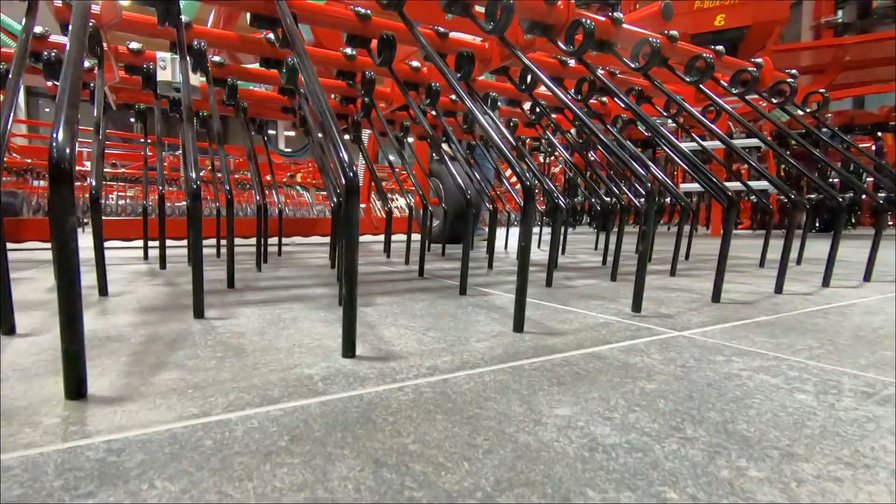Today I will give you an overview of our grassland care products and how to use them properly. After this short introduction, we're going to start with the training: Increase Forage Quality, Secure Grassland Yields. In the general part, I will give you an overview about the company and myself. Afterwards, we're going to take a look at the benefits of grassland care, what the targets on grassland care are, common problems and mistakes made in grassland care, and the right technique and operation. Directly after the training, you can ask questions in the live chat which have not been answered yet.

Now I would like to introduce you a little closer to the company EINBÖCK. The company is a family-owned business which is currently run by the third generation, and the fourth generation is also already included in the company. We are located in Austria at Dorf an der Pram. All development, construction, production and everything else is done here. At the moment we have approximately 200 employees, where 160 are in production and approximately 40 are in the office. You can buy our machines all over the world, and in most countries we have importers. In the US and in France we have daughter companies who take care of the sales. More details regarding our company and where you can buy our machines you will find on our homepage.

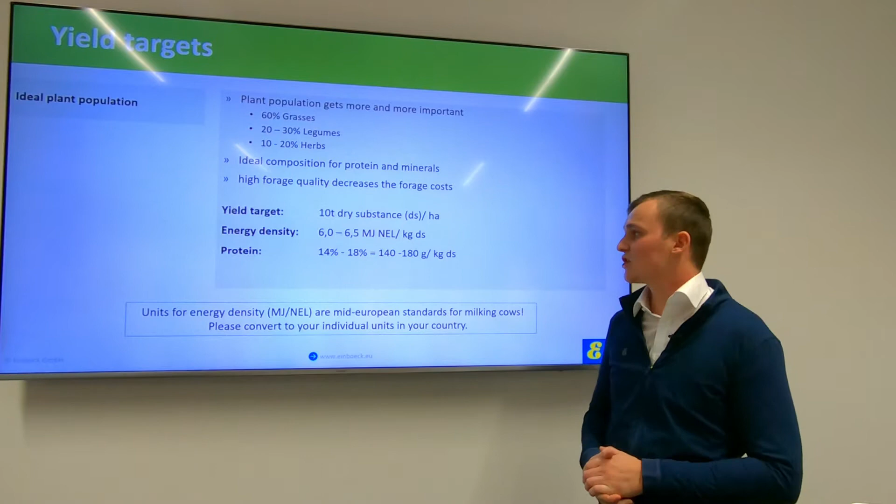High forage quality decreases the forage costs. Due to higher demands in milk production, it's necessary to increase forage quality. Here are yield targets for a high intense grassland with approximately 5 cuts a year. Our yield target here is 10 tons of dry substance per hectare. The energy density should be around 6.0 to 6.5 megajoule NEL per kilogram dry substance, and the protein should be somewhere between 14 and 18%. But please take care: the megajoule NEL is a mid-European standard for milking cows. Please convert your individual units to your country.

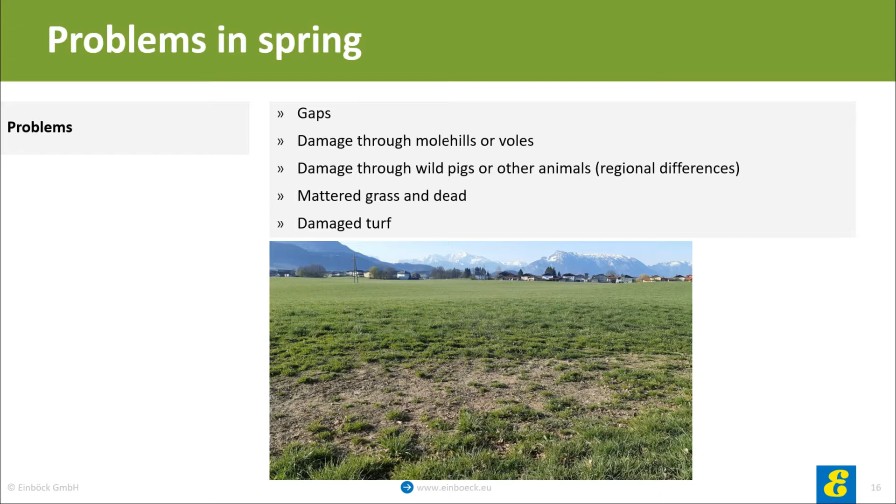To conclude, which problems do we usually face in spring? First of all, gaps of course, then damage through molehills and voles, damage through wild pigs or other animals. There is some regional difference of course, then matted dead old grass and a damaged turf.

In addition, there are a few factors which add to these problems. For example, slurry, high concentrated, spread out during wrong weather conditions. An unbalanced fertilizing can harm the grassland as well. Grassland which is too short or too long during winter will get a very slow start during spring.

And as for management, many cuts on an intense grassland can depress key plants. Pasturing in wet conditions can make big damage as well, due to footsteps and especially at the water access.

There are also many mistakes in management which can be done by mowing. The cutting height should always be above 7 centimeters. A big topic is always soil compaction in wet years.

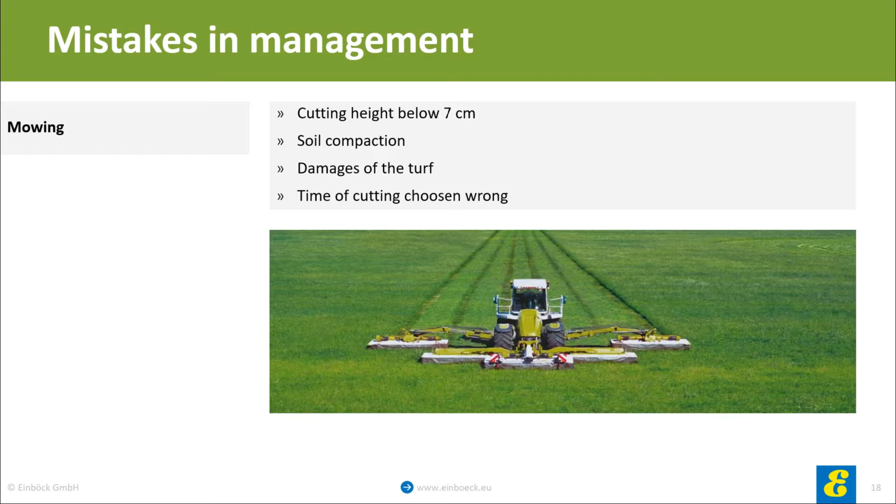I know it can be tricky due to time pressure while making hay or silage, but tremendous damage on the turf can be done. And the time of cutting is sometimes chosen wrong. Too late cuts can weaken the turf as well.

Soil compaction when driving on wet soil limits the growth of precious forage. Avoid mowing and spreading slurry in wet conditions. Often tracks are still visible in the next seasons.

But towing the grassland with a simple harrow is too little for quality forage and will not harm any weeds. Just mowing or towing the grassland once in spring is too little.

To have a quality forage, there needs to be some input. If there is no input, you cannot expect an output either. That's the same with arable land.

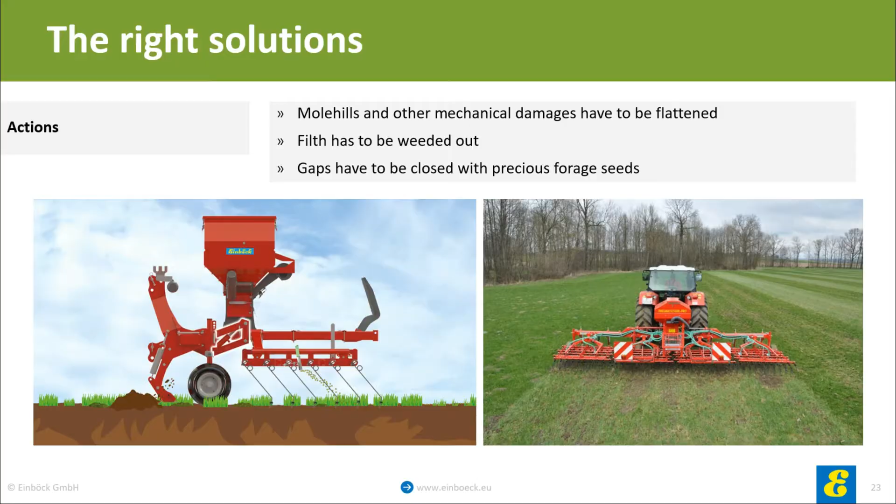On the right hand side, we see a picture of how grassland usually looks in spring. And here we see the gaps, and these gaps definitely have to be filled with new seeds again. With this machine, big molehills and other damages are leveled with the front leveling plate.

If you would just tow the grassland with a harrow, you would smudge the open and wet soil and the pores would not be open anymore. With this special front leveling plate, the open soil is jumping into the space where the tines are and will be distributed there. And here we have an overload protection by a tension spring.

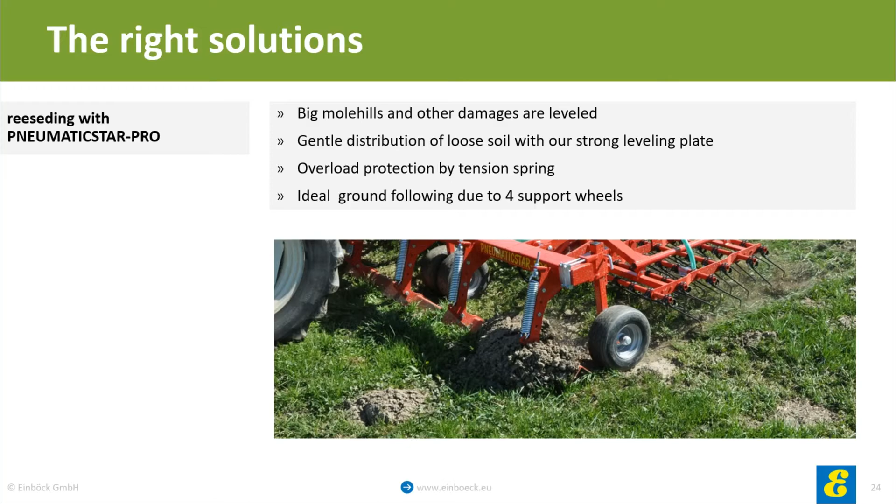Now a short video of how that's working in practice. Here you see a classic grassland in spring. The grassland is already in vegetation, before it maybe has been too wet or something.

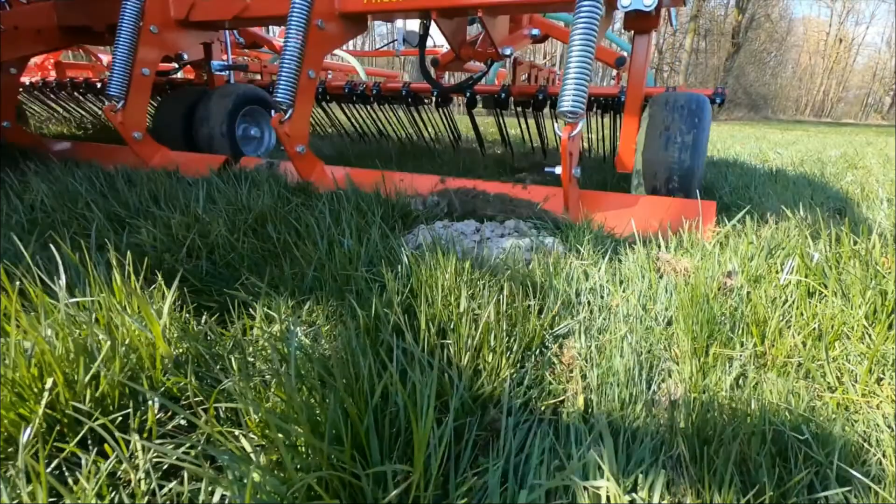And now we see what happens. The molehill will be lifted and distributed gently to the tine sections. Now that's important. Here you see how it should look afterwards. The soil is open and the pores are not smudged or anything. The soil can breathe and reseeds can quickly germinate in this good soil structure.

Then the tines are doing their work. The EINBÖCK tines are individually developed for grassland. For lighter soil, the tines with 8 mm diameter are recommended. These are also the standard tines on the EINBÖCK grassland machines. Highly recommended in all other conditions are the 10 mm tines. These are the classic grassland tines.

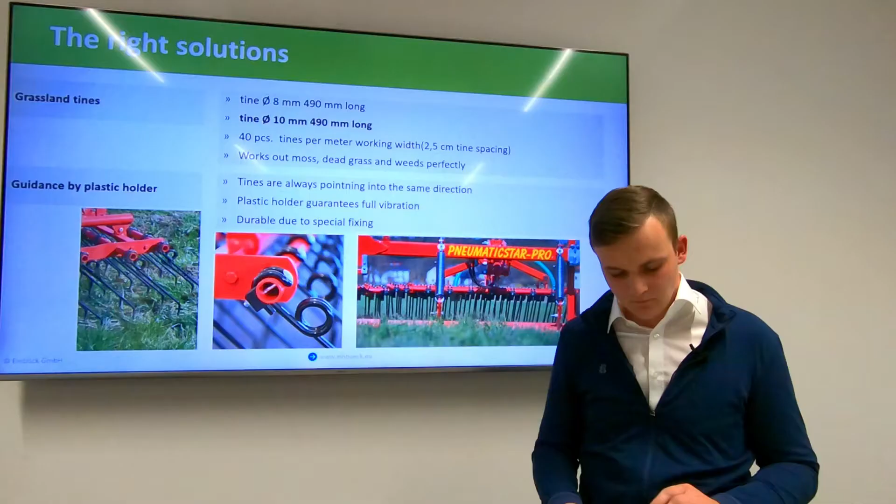EINBÖCK has 40 tines per meter working width, so that's 2.5 cm tine distance. That's really perfect for getting out moss, dead old grass, and they weed perfectly. The tine itself is held by a plastic holder. The holder ensures that the tine is always guided straight and also goes back to a straight position as soon as work is done. The tines are bent at the end, which we can see here.

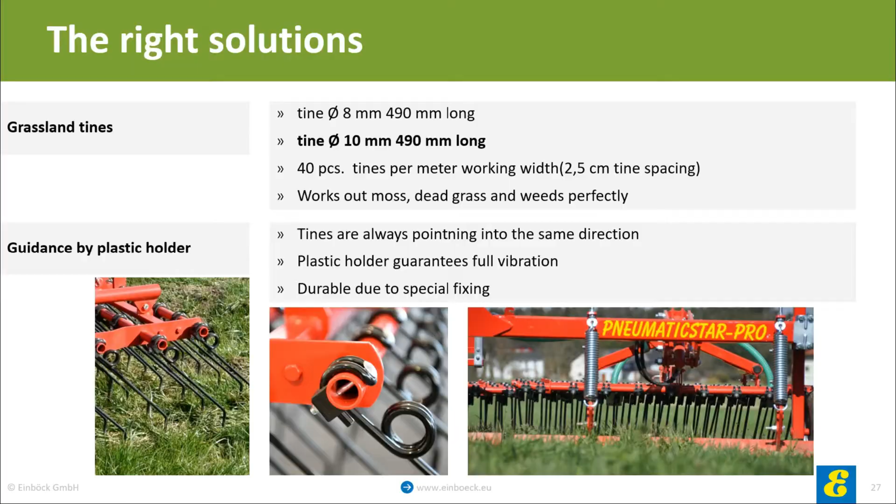Therefore, it's possible to adjust it with the handle on each section to pretty aggressive to the front or to drag when maybe the grassland is a little wet. Here we see the tine distance once again. The tines are mounted on 6 rows, so the machine is really working the whole surface. Many grassland machines on the market only have 1/3 the amount of tines, sometimes only mounted on 2 rows. With that solution, it's not possible to work the whole surface in one crossing.

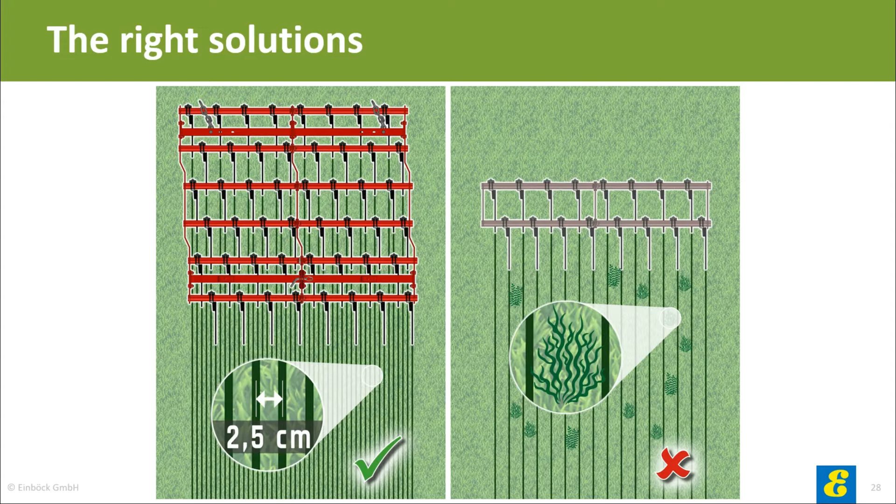Here we see pretty well how the organic matter can be worked out on the full surface with the many tines we have on the weeder. The machine has the perfect frame for this work. The main frame is following the ground perfectly. In addition, the machine is guided by 4 support wheels, which includes 2 double wheels in the middle. The folding wings can also compensate 10 cm to the bottom, so it's perfectly following the ground.

The hydraulic level control, which we have here, has quite a lot of advantages. The hydraulic sections are all connected to each other, therefore the system is taking pressures from weeding in the crusty soil at the beginning of the season from the machine like a spring and will distribute them to all sections. The hydraulic pressure can be decreased or increased from the tractor cabin, so that's pretty comfy.

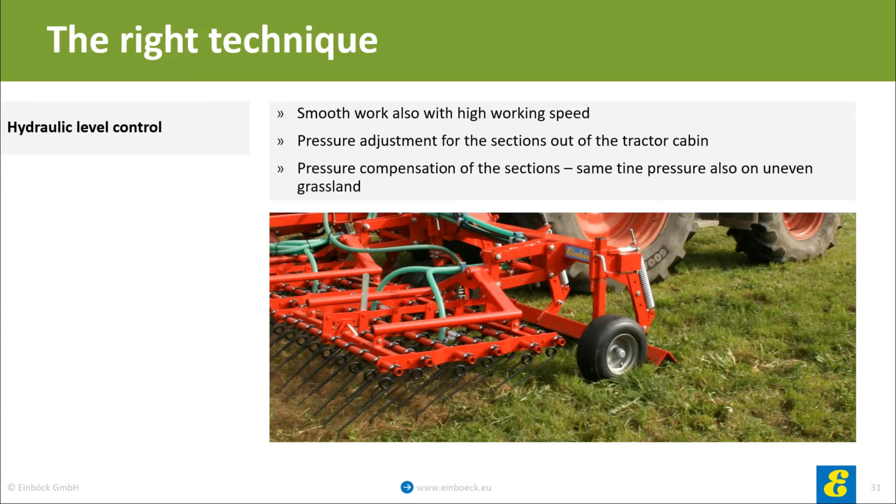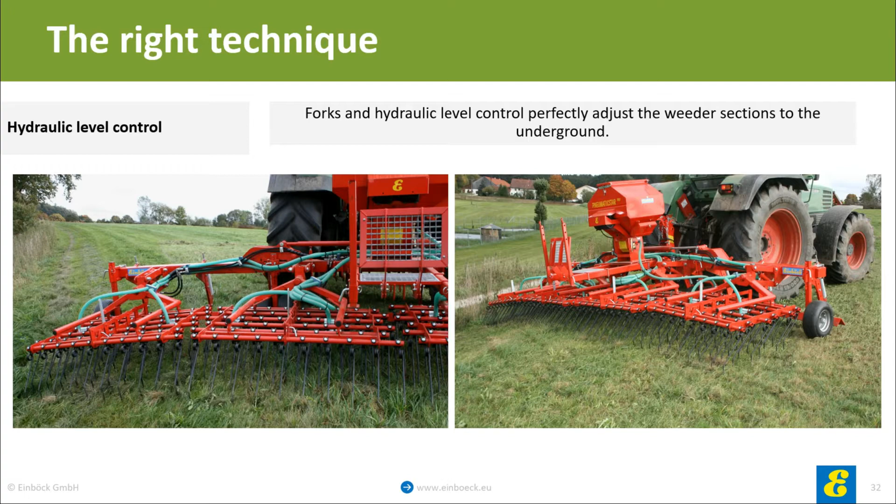Also, as the leveling plate is in front of the support wheels, the machine is running much more gently. As we see right here on the pictures, the hydraulic level control provides perfect ground following on the edge of fields or on hilly land. Now, here is a short video of how the machine is working. That's how grassland care should be done. The organic matter is weeded out and grass is reseeded.

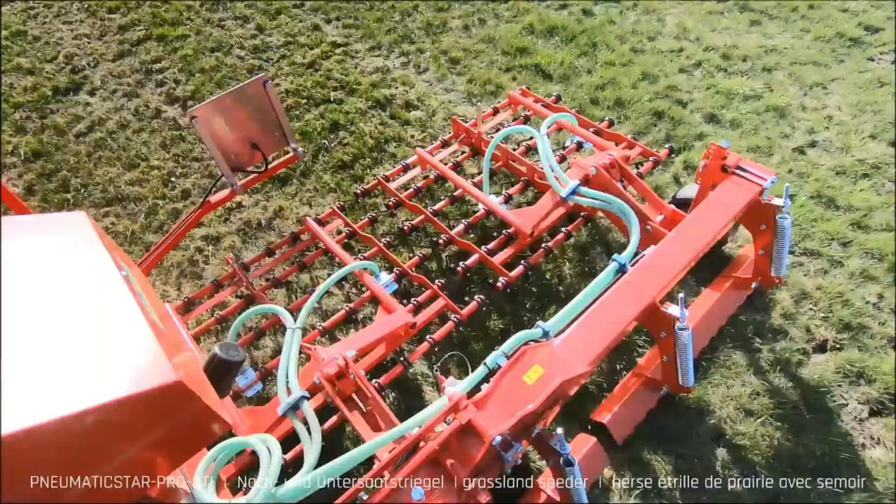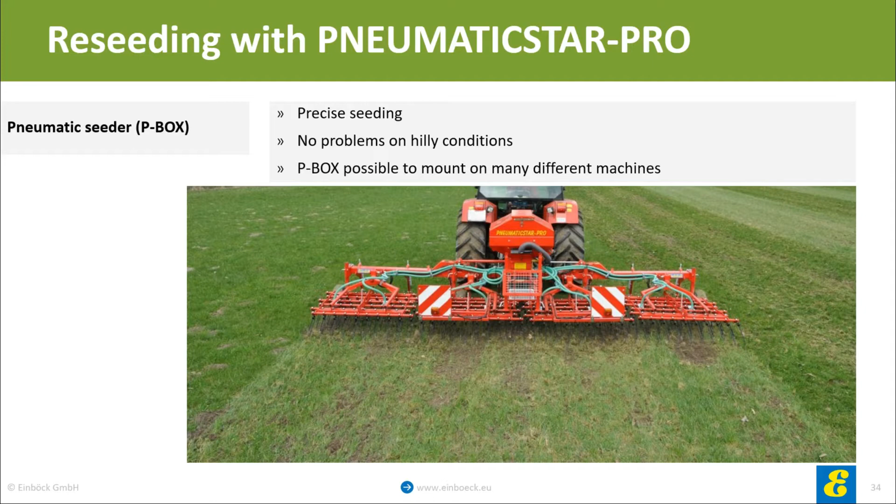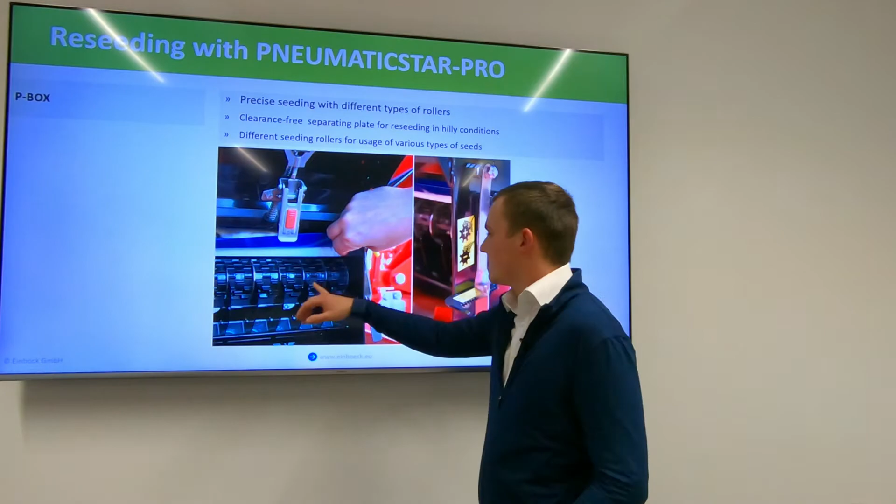The seeds will be seeded precisely and in the gaps which we see here on the picture. And as we have seen previously, the machine and the seeding box have no problem with hilly conditions. Now let's take a closer look at our seeding box itself. As we see right here, the seeding roller has some separating plates, which will guarantee that also in hilly conditions the machine is working properly.

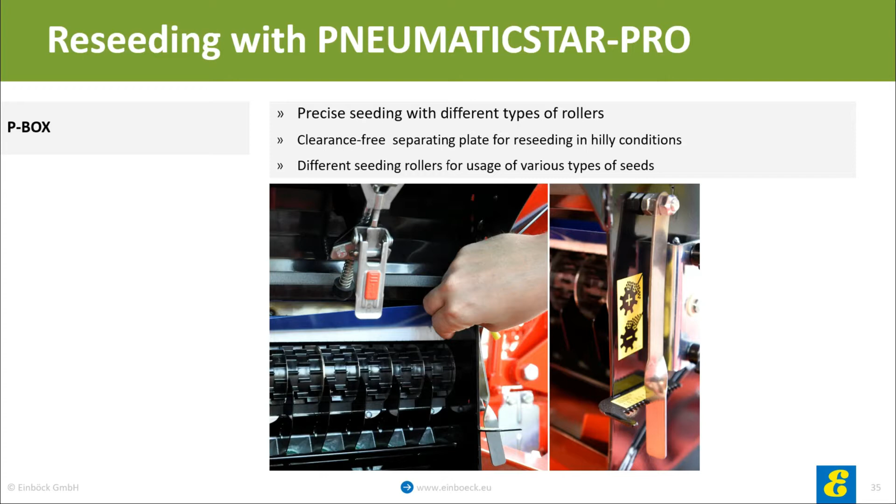With the handle over here, we adjust this brush. The brush takes care that the excessive seeds are staying in the tank. Also, there are several different seeding rollers available. Depending on the size of the seeds or on the working width, we can change them real quick. On the box a fan is mounted. The fan is blowing air to where the seeding roller is letting out the seeds, and the seeds will be blown out to the hoses as we see here.

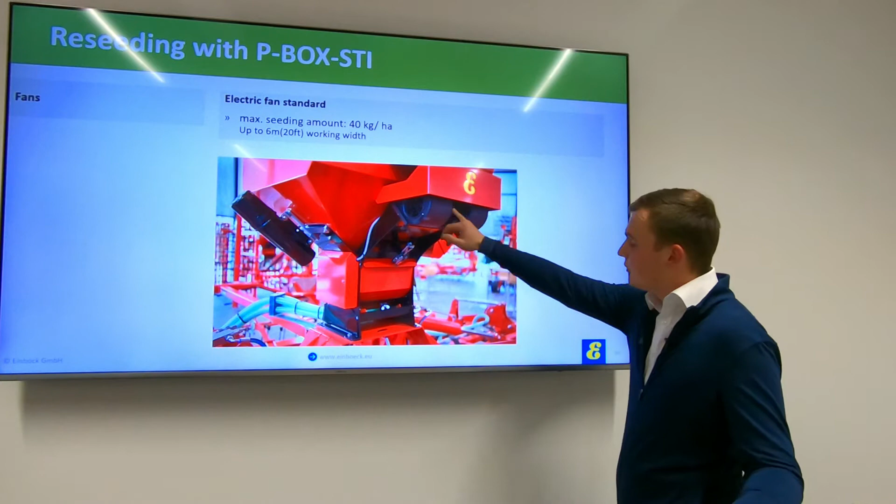Here the blower is sitting, blowing down air here where the seeding roller is, and it will be distributed to the hoses. Up to 6 meter working width, the standard electrical blower, as we see it right here, can be used.

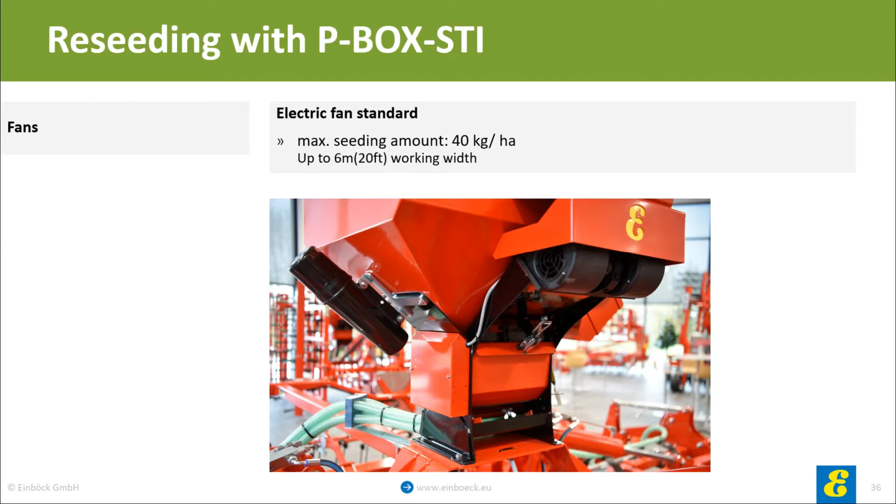It will generate enough air for seeding amounts around 40 kg each hectare. If bigger amounts or bigger seeds like grains are seeded, a mechanic or hydraulic fan is necessary. First I will show you the mechanic fan. With this mechanical blower, a seeding amount of approx 200 kg each hectare is possible.

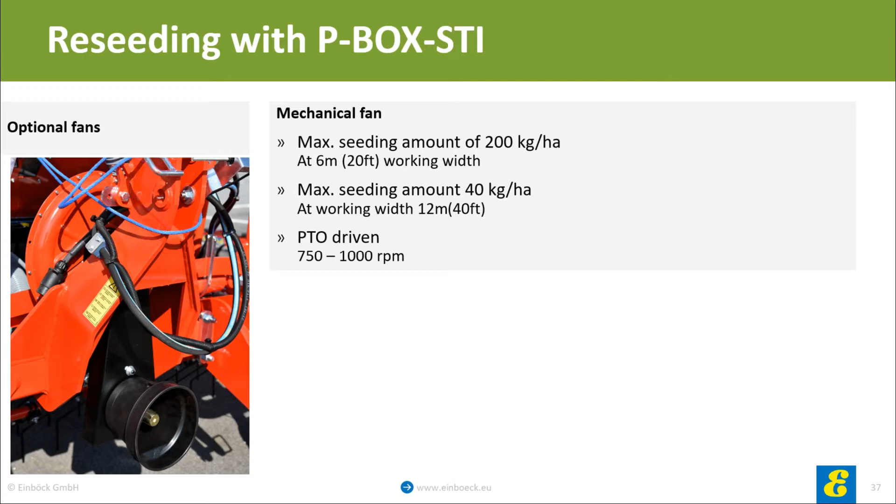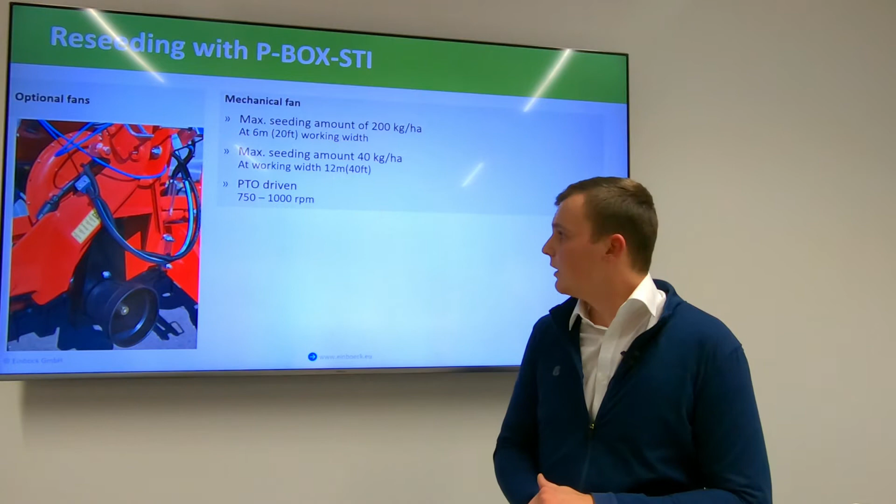Here we are talking about 6 meter working width. When we go to 12 meter working width, still 40 kg of seeds are possible. The PTO drive shouldn't be below 750 rounds per minute. Usually we recommend 750 to 1000 rounds per minute.

Then there is also the solution of a hydraulic fan. This type of fan can have its advantages as soon as the blower should be mounted on another machine like a cultivator or anything else. The fan can be mounted and dismounted quicker. So if there are two machines which need access to the box, we usually use the hydraulic version instead.

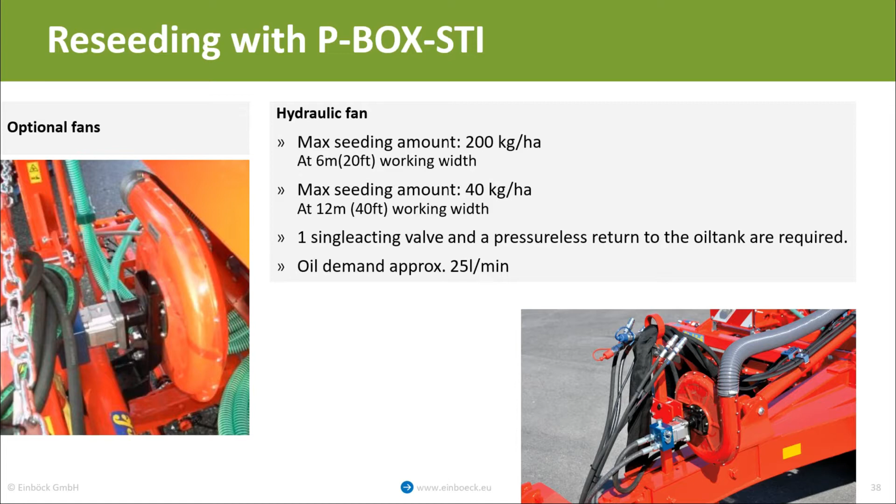Again, like the mechanic fan, here we have a maximum seeding amount of around 200 kg per hectare on the 6 meter working width and on 12 meter approx 40 kg. I'm always talking about a working speed of around 6 km per hour. Here we just need a single acting hydraulic valve and a pressureless return to the oil tank of the tractor. The oil demand is approx 25 liters per minute. For example, on this PNEUMATICSTAR-PRO with 12 meter working width, which is trailed, we use the hydraulic fan.

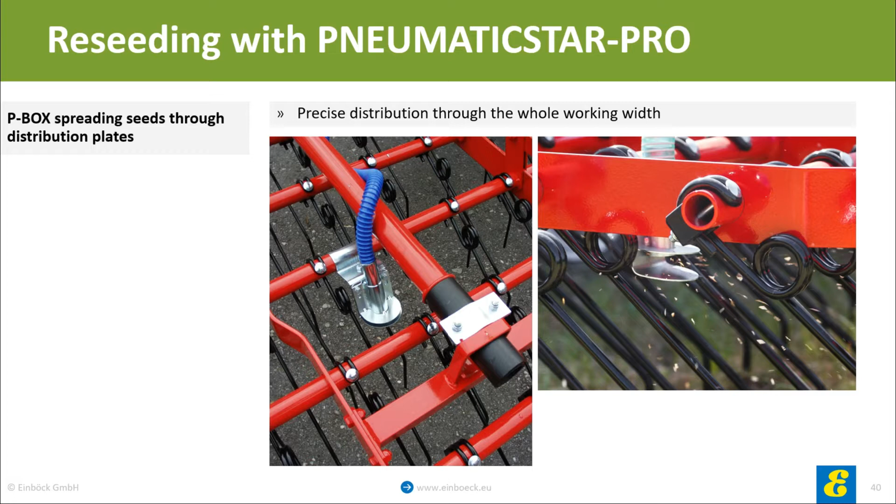Now let's take a look at the steering of the box. First, there is a simple one which is driven mechanically by a wheel, which is called P-BOX MD. What we have here is the P-BOX STI. The STI can be linked with the 7-pole cable to get the speed and upper link signal. Of course, here a plug in the tractor is required. Also we can get the speed and upper link signal from a sensor, which is standard on the equipment.

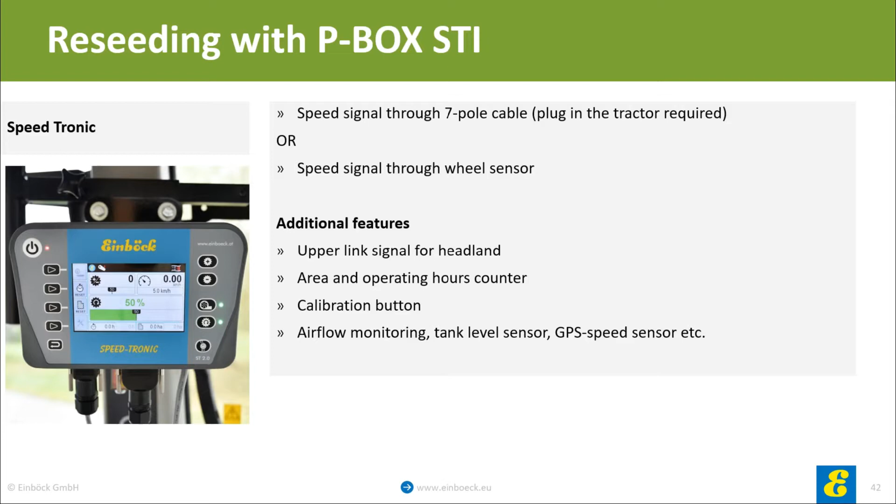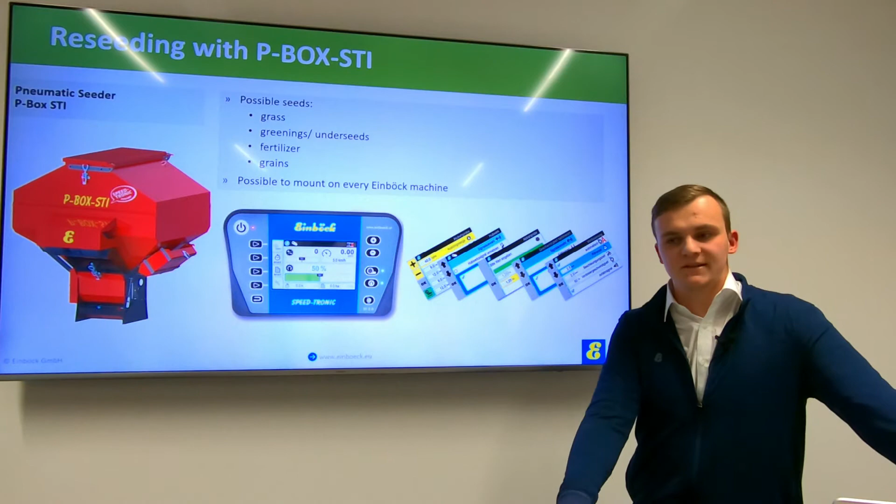Additional features are an area and operating hours counter, a calibration button, an airflow monitoring, tank level sensor, or different sensors for speed like GPS sensor or radar sensor. So which seeds are possible, no matter if STI or MD box? Definitely, of course, grass seeds for reseeding. Then we have underseeds or greenings; even fertilizer or grain is possible. The box is possible to mount on every single EINBÖCK machine and also on foreign brands.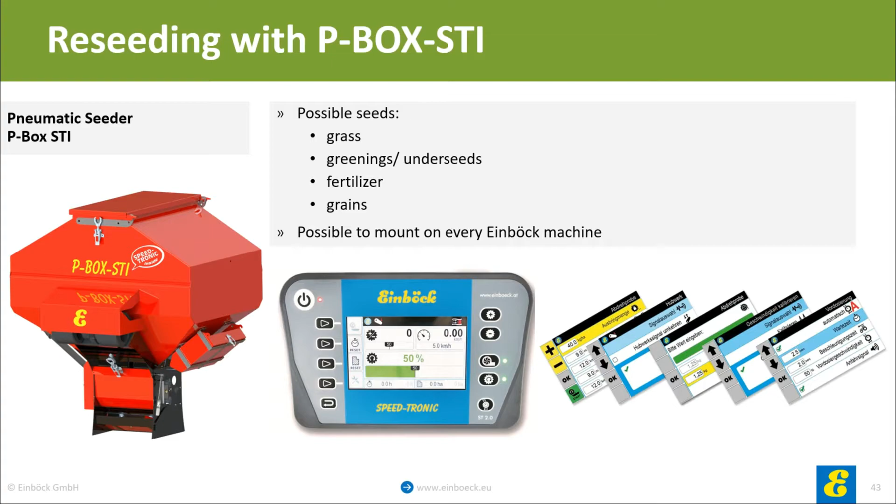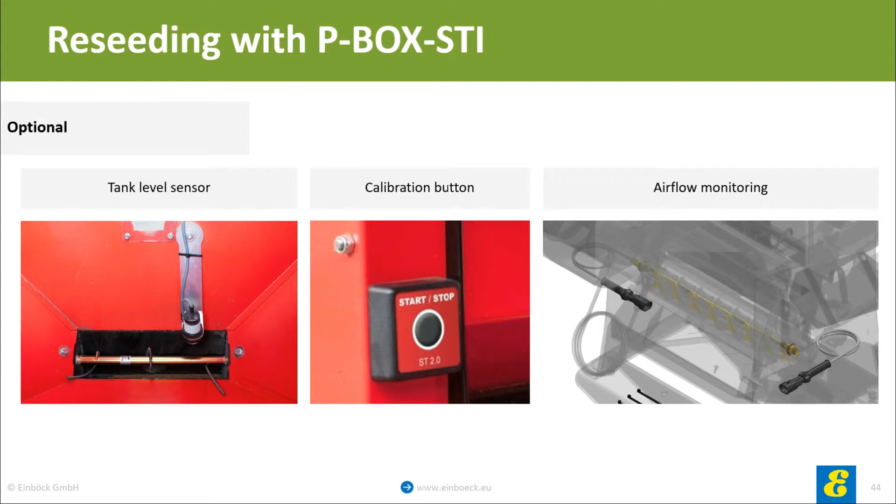Now, as we have been talking about our technique a little, we're also gonna take a closer look at the redevelopment of grassland and the different ways to do it. First of all, it's recommended to exceptionally mow the old grass deeper. If required, do weed control and create gaps for the reseeding. Work out moss with the tine weeder. On highly damaged grasslands, a rotavator or rotor harrow can be a solution. Depends on how high the damages are.

After very intense reseeding, rollers like Cambridge rollers are recommended. Still, some rain is the best recompression the seeds can get. The pH value shouldn't be below 5.5. If it's the case, the redevelopment won't work properly. The conditions for germination are pretty bad then. So what are our possibilities? Plowing and reseeding is a possibility, of course. Then we have different types of direct seed technologies. A redevelopment with a rotary harrow or rotavator is possible.

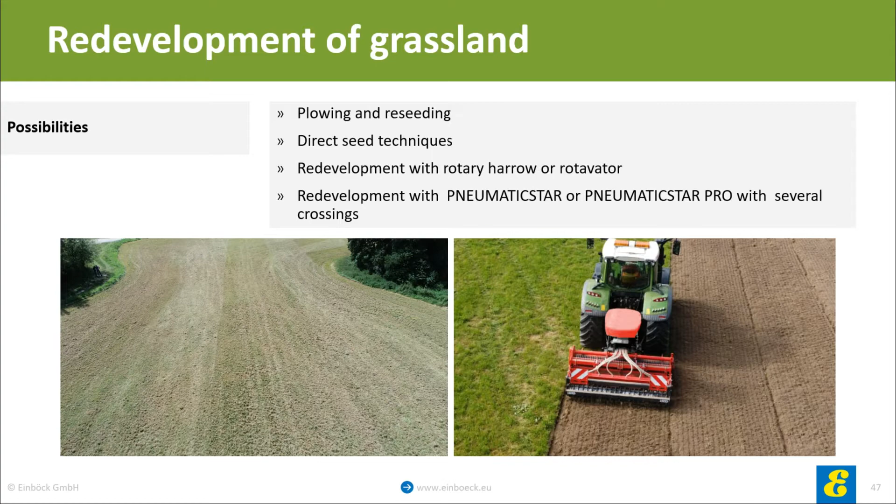And then last but not least, a redevelopment with a PNEUMATICSTAR with several crossings to get out the weed, and then at the last crossing we reseed. Let's come to the plowing in reseeding.

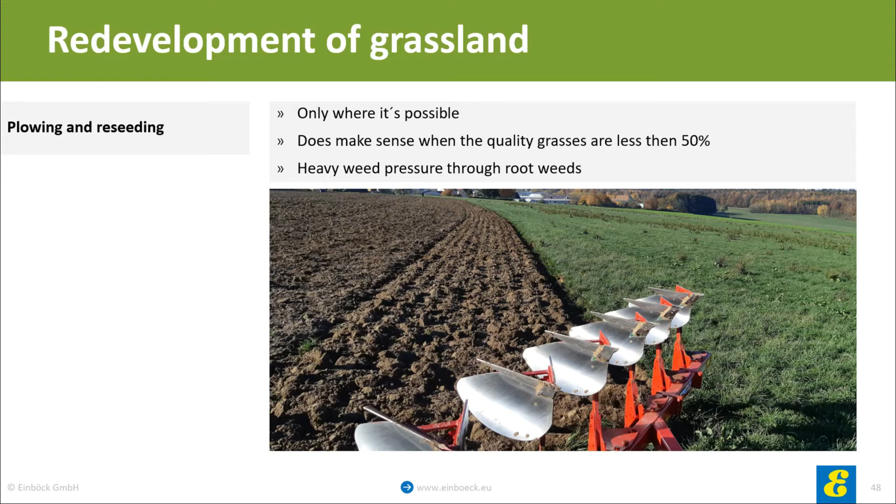Sometimes plowing is not even possible on every grassland. Plowing means high costs and low hectares each hour. And it makes only sense when the grassland is really totally damaged or destroyed with heavy weed pressure. It does only make sense when the quality grasses are less than 50%.

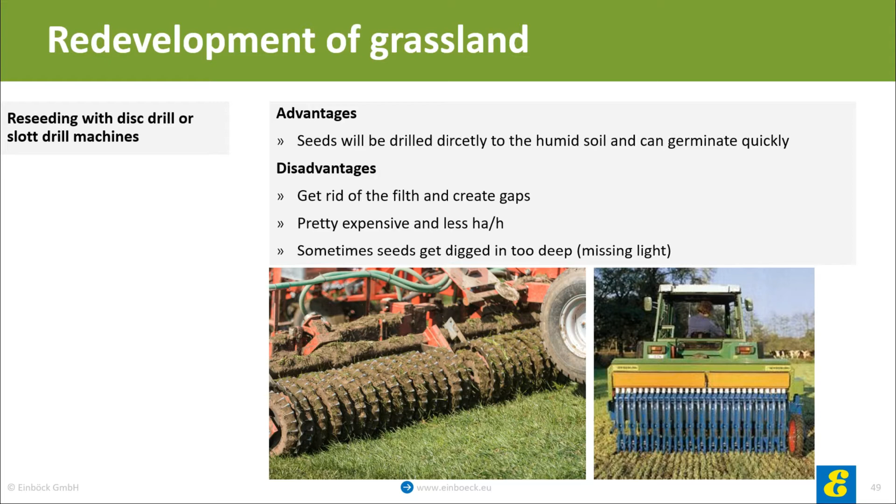Then there are some different types of disc drill or slot drill machines. The advantages of these types are the seed will be drilled in directly to the humid soil and can germinate quickly. The disadvantages are you won't get rid of the matted grass and create no gaps. If there is some dead grass, it won't touch the wet soil then anymore and will have problems to germinate again. Also, this version of redevelopment is pretty expensive and ineffective. Sometimes seeds get dug in too deep, so they are then missing light and cannot germinate anymore.

Then the third point is the redevelopment with a rotor harrow or a rotavator. This version does make sense when the quality grasses are less than 50% and there is a high weed pressure. Also, damage through wild animals can cause such drastic steps.

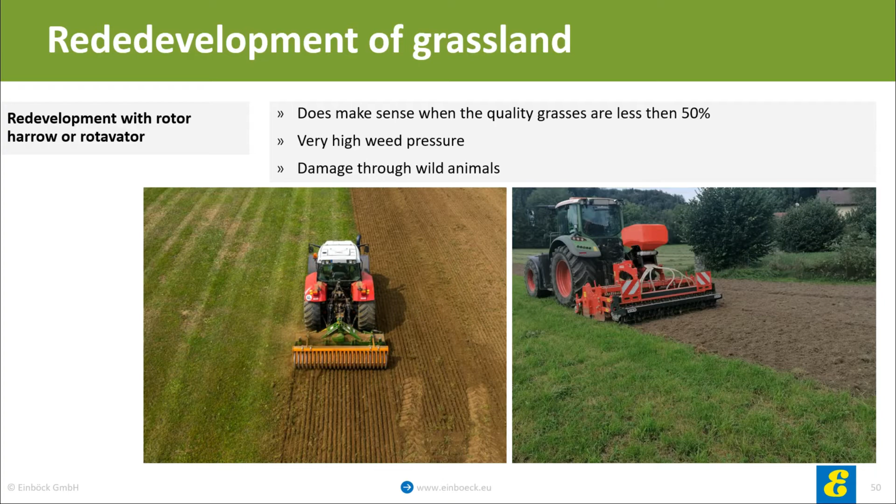But please take care. With a high amount of dead organic matter in the damaged grassland, and if you rotavate it then, it won't be possible to compress the soil anymore. If it's then reseeded, the seeds won't have contact to the soil anymore. Also, it's quite a big amount of soil which will be moved. This can disturb microorganisms. And it can take some time until the new grassland is fully developed. Therefore, that's quite expensive as well.

Now I'd like to show you the effects of weedy grassland a little closer with a small calculation. As we have been talking before, the grassland yield should be somewhere around 10,000 kg dry substance each hectare. The energy density is somewhere around 6.0 and 6.5 megajoule NEL each kilogram. And we are hoping for around 16% of protein.

Now let's take this example with 15% gaps, weeds or any other useless plants in the composition, and we are missing out then on 9,000 megajoule NEL per hectare and in addition 240 kg protein. Please again, I'm calculating with mid-European standards, so please feel free to convert it to your unit and also convert the euros to your currency in the country.

Now with this 15% of gaps and the following 240 kilo protein per hectare, we can do the following calculation. If we replace the protein loss with soy meal, and if we take a soy meal with 40% of protein in it, we need 600 kilograms of soy to compensate the loss of 1 hectare on protein. So if we calculate then with the current price, which is more or less 0.39 euros each kilogram, then we are losing out only on protein on 234 euros each hectare grassland, just with 15% of gaps.

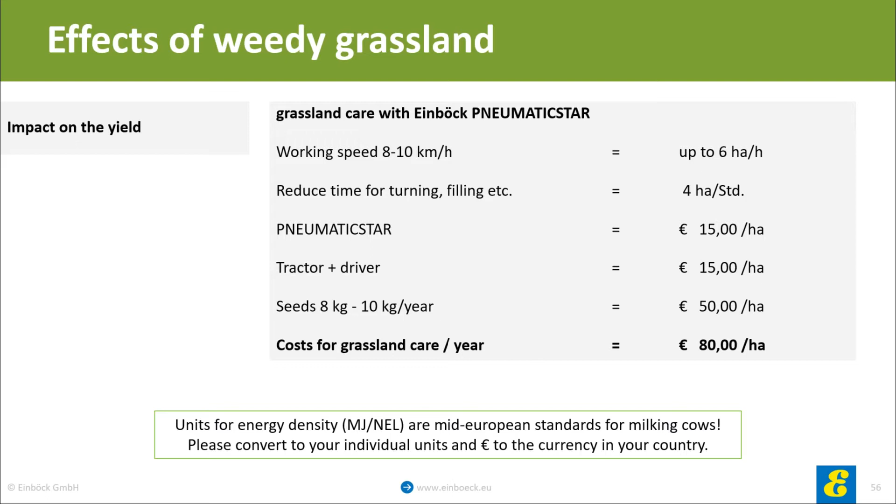So even if the currency and prices are different in every country, the relation from care costs to loss due to gaps in grassland are everywhere the same. So now I would like to take a little look on the fertilizing of grassland. Of course, it's not only about nitrogen, but it definitely needs to be highlighted. For the wanted 10 tons of dry substance, we need around 220 kg of nitrogen each hectare. Without that, these yields will never be possible.

Of course, these amounts, the 220 kg, are way too high to fertilize in the grassland, but therefore the legumes are really important also when you choose the seeds for reseeding. 60 kg we already get from the legumes in the composition. Therefore, 160 kg nitrogen each hectare would still be needed. That's approx 30 to 35 kilo each cut. Still, there are more indicators for fertilization.

Limestone, for example, weakens the dock and strengthens the grasses. Approx 1000 to 1500 kg each hectare limestone is recommended every second season, I would say. The best time of the year for limestone is with the reseeding. The pH value should never be under 5.5. Otherwise, it will be bad conditions for germination. Please take care when reseeding alfalfa or clover, the pH value should be somewhere around 6.5.

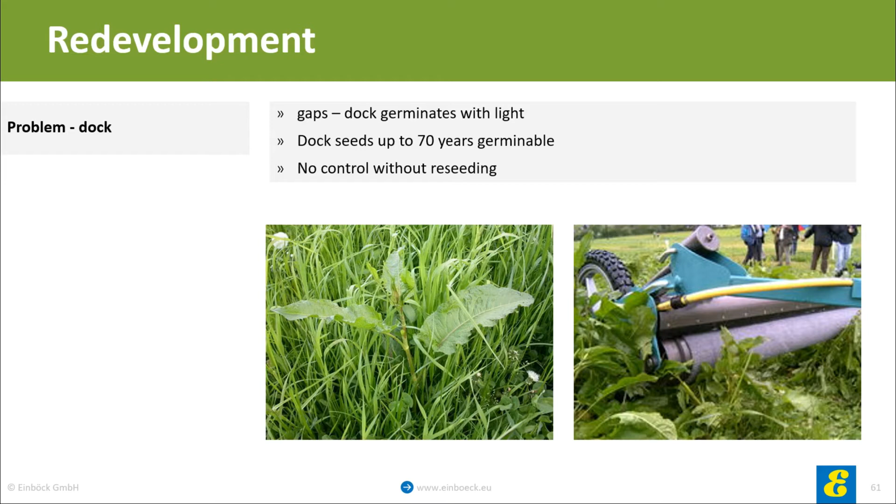Now a quick stop at the most usual weeds in grassland. Dock, for example, which we have here, is germinating with light. Therefore, he is using all the gaps which are in a damaged grassland. Therefore, it's pretty important to close these gaps with precious forage plants. The seeds are germinable around 70 to 100 years. Without reseeding, there will never be any control of this plant, because all the gaps always need to be closed.

But one of the biggest issues in the grassland is always Poa trivialis. I don't know how common it is in the different countries which are watching, but in the mid-European area that's a real big problem. Also, like the dock, it's a gap filler mainly on soils with a lack of oxygen. It's a durable weed with roots on top of the soil. Within the second cut, it gets more and more smelly and felty. Therefore, with this smell the cattle won't eat it anymore if the amount is too high.

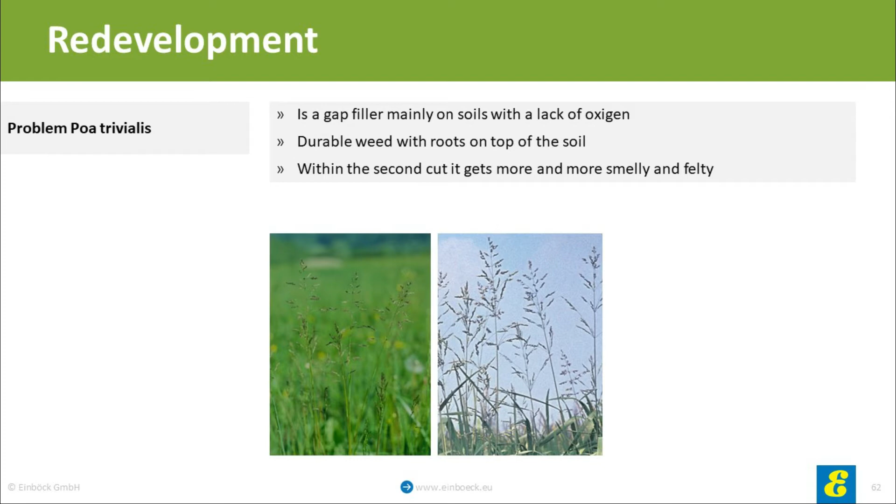Now we see a picture how it looks after the second or third cut. It's crawling on the ground and not making any yield anymore. So what helps? Continuous reseeding so the gaps cannot develop where it has space to grow. With aggressive weeding it can be ripped out easily, and especially in summer it's easier to regulate because the roots get dried out easily by the heat. You won't see any growth anymore like here in the picture. Therefore there is no yield anymore, while all other quality grasses remain growing.

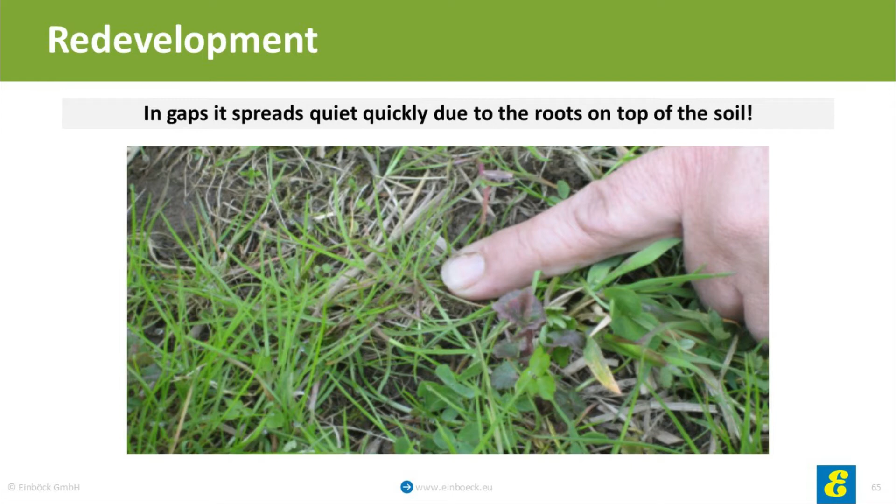Here we see on this picture how quick it can develop and fill the gaps due to the shallow growing roots. So what can help us? First of all, aggressive weeding, approx 3 to 4 times, then swath it and drive it off, of course. Then the reseed, and afterwards maybe a roller, because on uneven soil a Cambridge roller is recommended. Sometimes it needs to be totally renewed, because there are way too many weeds, so reseeds wouldn't make sense anymore.

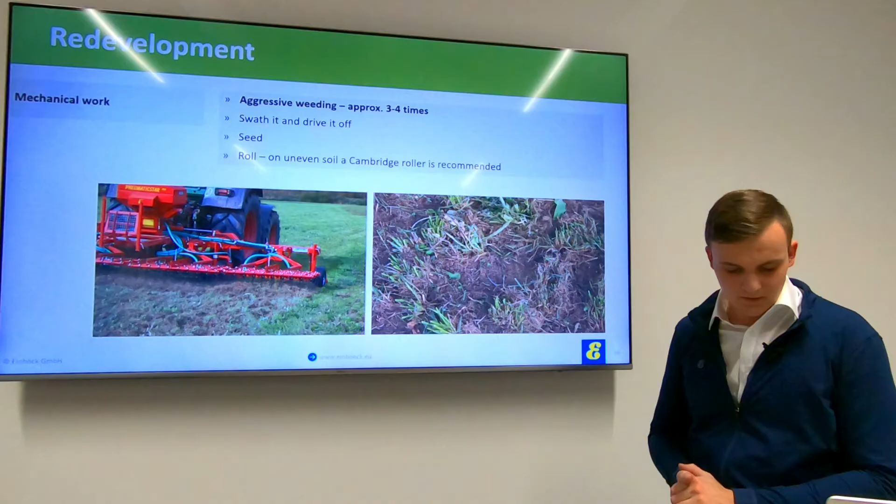When we take a look at the picture, all the organic matter will be weeded out. So that's a tricky one. Even if the grassland looks quite clean and nice and green, you see how much organic matter is coming out at the back. And this organic matter needs to be driven away, of course.

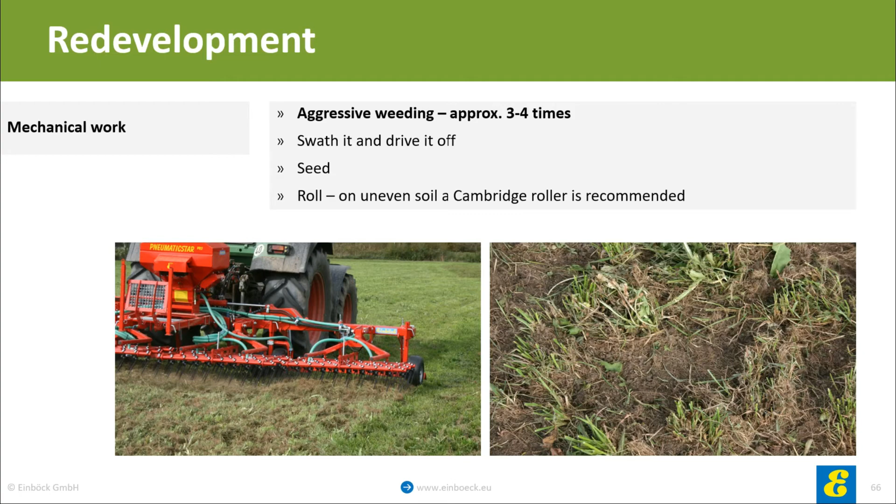In the other picture, we see how big the gaps are now after a few passes with the PNEUMATICSTAR. There the seeds can germinate perfectly. If we reseed just at this pass we see in the first picture, the seeds will never be able to get some soil contact. Now sorry for the poor quality of this video, but it's a perfect example from a farmer.

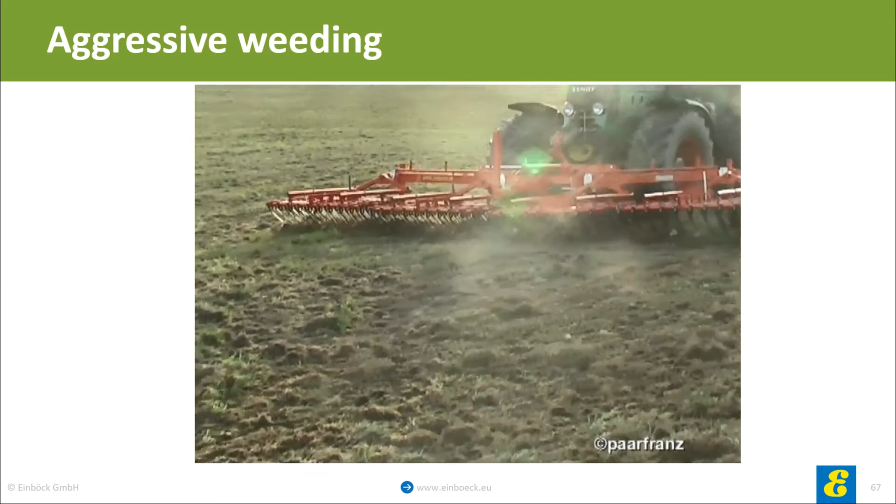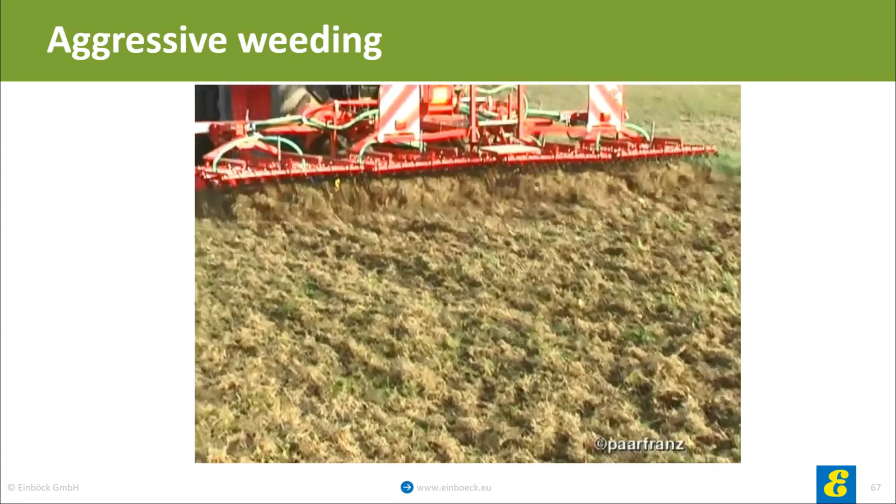It's amazing how much material he's getting out of this grassland. And definitely here you cannot do any reseeding with this pass. The matter definitely needs to be driven away. And here is one more video with the similar result. It doesn't matter that the weeder is dragging the material, because anyways this needs to be driven away. So swath it and drive it away.

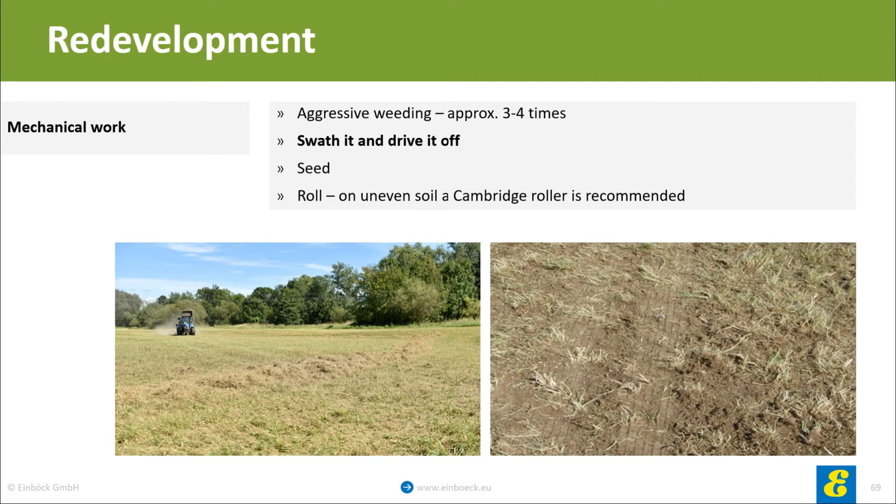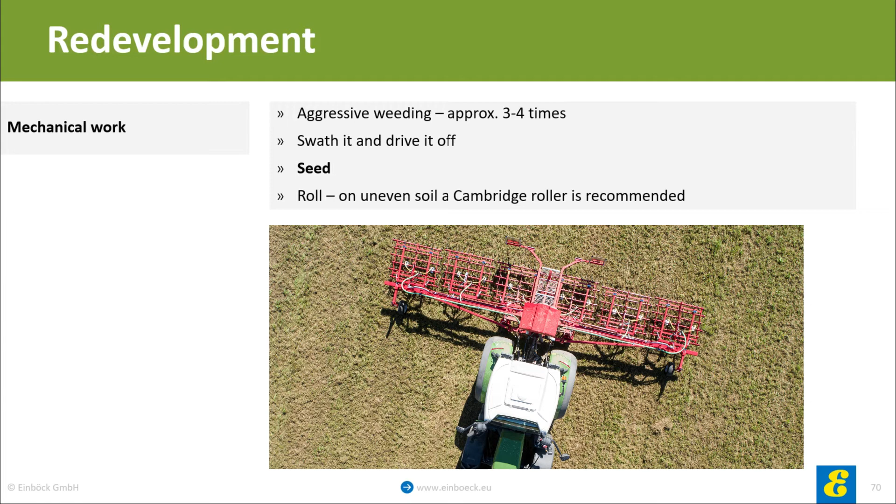And on the right hand side we see a well prepared grassland for the reseeding afterwards. Here a new start can be done. Then next step is seeding. With at least the amount of kilogram each hectare like it would have been with a newly reseeded grassland, so at least 20 kilogram each hectare is necessary.

So the last step is the rollers. With this strong reseeding method, now it can make sense to use a roller. So rollers, yes, when I have opened my soil and made a lot of gaps for a redevelopment, but not in a vegetation. There it bends down the grass and it will depress the growth of about 10 days. So why EINBÖCK?

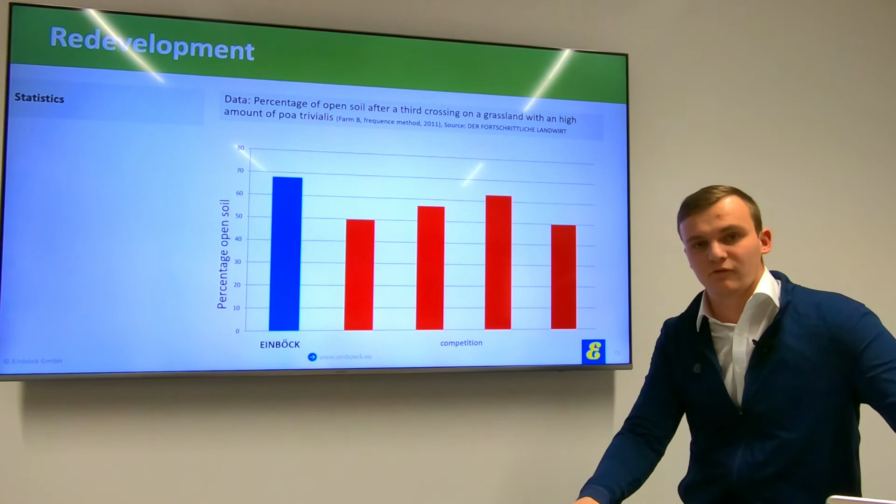There was once done a comparison of different types of grassland weeders, and some of them only have a few tines, some of them don't even have bended tines. And here is the big advantage of EINBÖCK. On these tests, the EINBÖCK weeder has worked out the most moss, dead grass and other organic material, as we see here on the graphics.

As I've already told you guys, rolling is sometimes necessary to close the contact to the soil. It should not be done in connection with the weeder. Weeding and compressing again is counterproductive. Material which has been worked out will straight after that be compressed to the soil again. So that makes no sense. So rollers only make sense when you have done a redevelopment, not when a simple reseeding or grassland care is done. If rollers, then heavy rollers and with low speed.

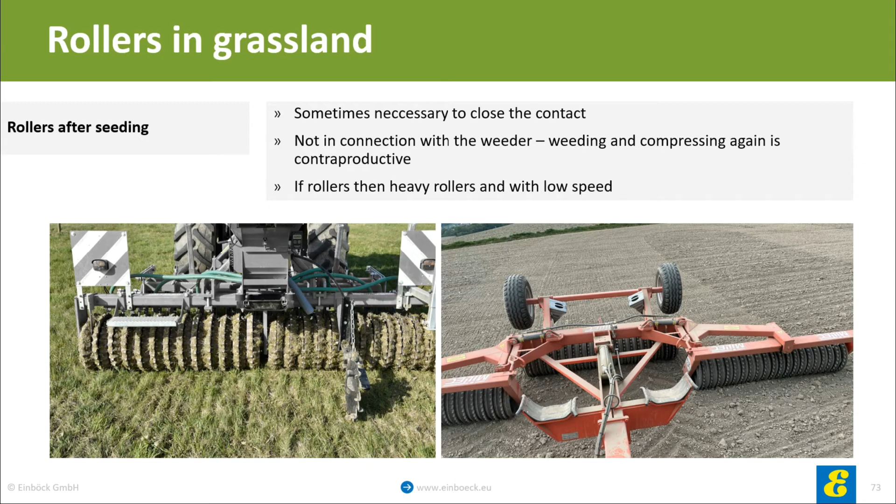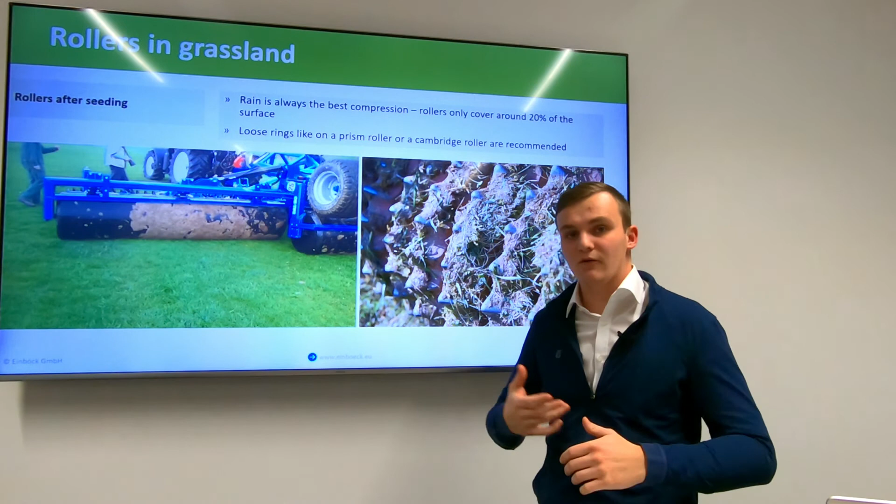So I would say rain is always the best compression. Rollers only normally cover around 20% of the surface. Loose rings like a prism roller or a Cambridge roller is always still then the best. But still, if we take a look at the picture at the right hand side, we see that only the top of the rings is touching or compressing the soil, and therefore never the whole surface is compressed together. On this picture we can see once more, it's only the rings or the lines who are touching and compressing the soil.

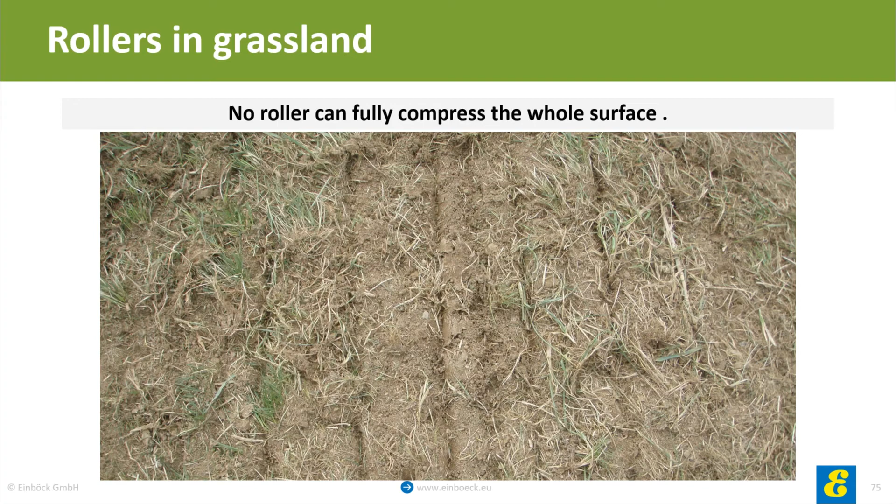Now let's talk a little bit about grassland machines with weeders and rollers combined. So for me, in my opinion, the perfect work speed of a tine weeder is somewhere in between 8 to 10 kilometers per hour. The perfect work speed for a roller is maximum 5 kilometers per hour. Therefore, the roller won't work properly on higher working speed and the weeder won't work on lower speed, of course. Also, as I said already, the dead material will be rolled in again.

And as we talked previously, on a natural grassland, the roller is never able to cover the full surface. So on the graphics here we see it once again. With the grassland machine combined, roller and weeder together, we have a half done work and half of the amount of hectares done in an hour. And the machine will still be much more expensive.

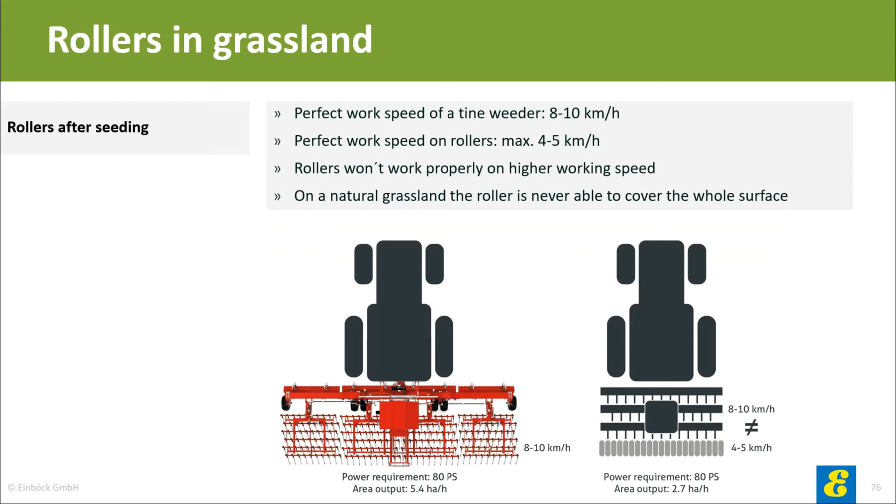So I would also talk a little bit about the right time of seeding. In my opinion, there are 3 times where it's, I would say, recommended to reseed. In general, we can say directly after the winter, because there it's anyways important to refresh the grass with the weeder to activate tillering and the soil has enough humidity so the seeds can germinate.

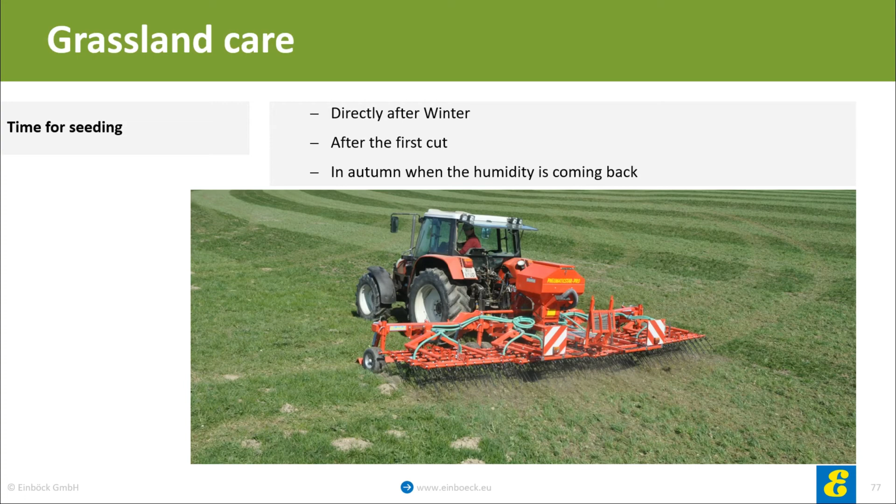Where it's too wet, it is more recommended to do reseeding after the first cut. In summer, when it's dry, reseeding will not make any sense since the seeds will just dry out. It makes sense to wait until late summer or early autumn, when humidity returns during nights. That's enough for the seeds to germinate, and the main turf is already weakened due to an intense summer with many cuts, so the seeds can start growing easier.

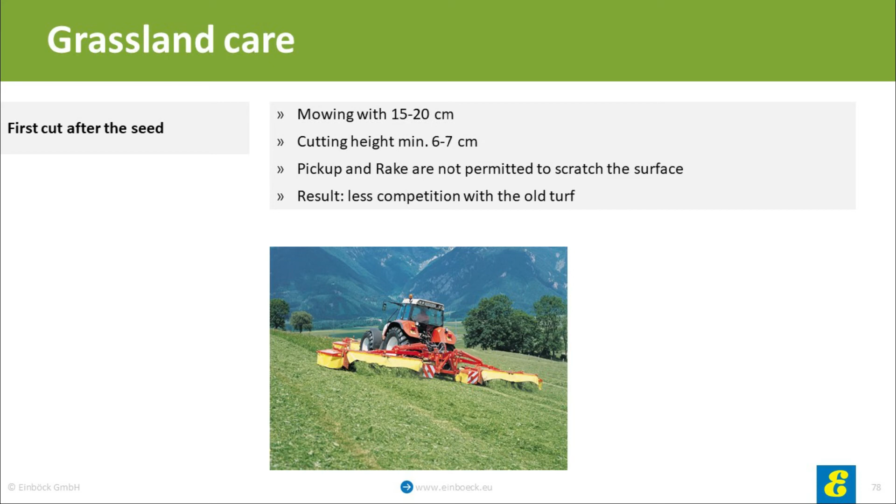Before the first cut after reseeding, there are a few points to take care of. The first cut should be mown at a height of about 15 to 20 cm. The cutting height should be minimum 6 to 7 cm, so the reseed is safe. Pickup and rake are not permitted to scratch the surface, and the result is then less competition with the old turf. Now I'm gonna show you a picture of how a well-developed reseed with precious forage grasses should look.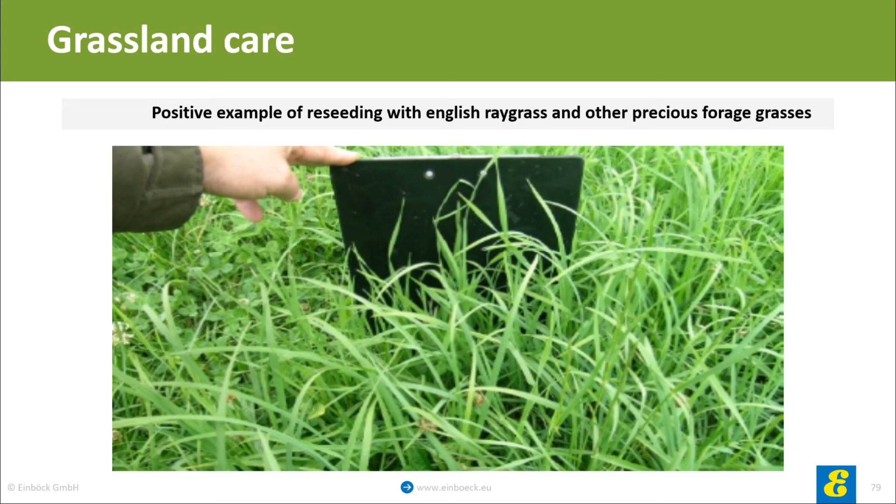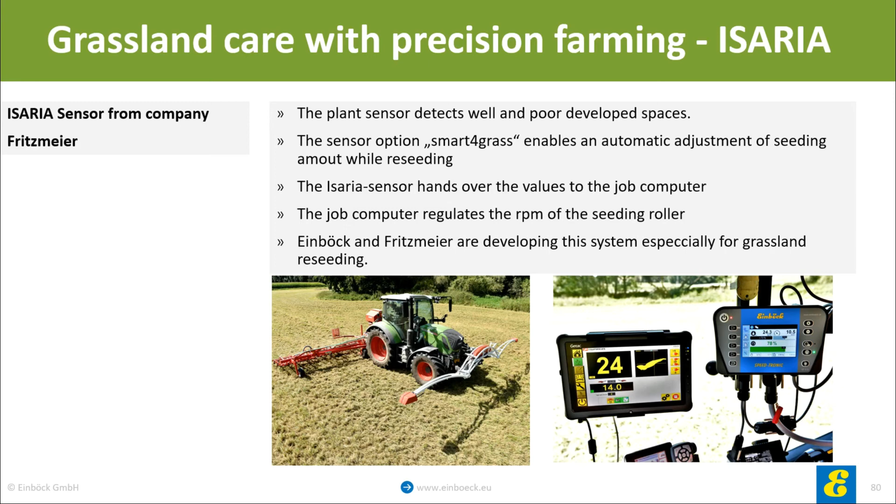Now I would also like to introduce you real quick to a new partner of grassland machines of EINBÖCK: the company Fritzmeier, with their sensors ISARIA. The plant sensor detects well and poorly developed spaces. The sensor option smart4grass enables an automatic adjustment of the seeding amount while reseeding is done with the EINBÖCK PNEUMATICSTAR. The ISARIA sensor hands over the values to the job computer, which then regulates the revolutions per minute of the seeding roller. EINBÖCK and Fritzmeier are developing this system especially for grassland reseeding.

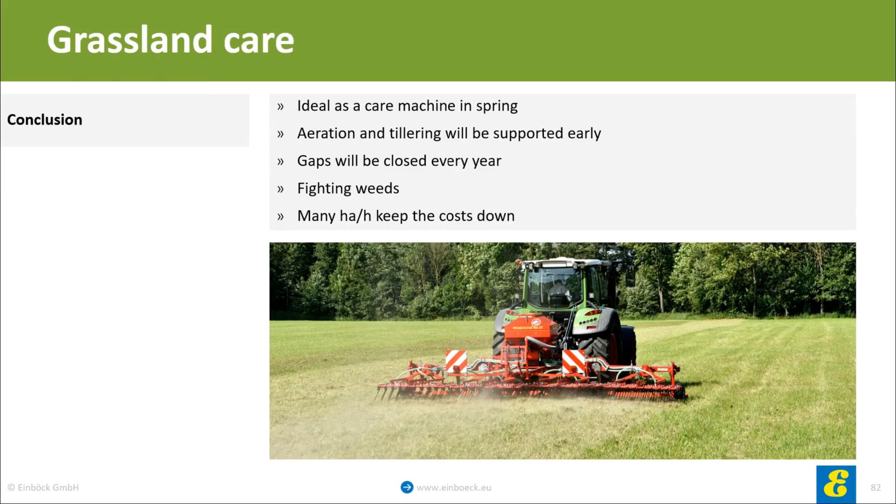So to conclude the training real quick, I would say the most important step at the beginning is to identify your causes, then set actions early and harvest success. On the long run, a reseeding and grassland care with our PNEUMATICSTAR is always cheaper and makes more sense than a total renewal. The PNEUMATICSTAR or PNEUMATICSTAR-PRO of EINBÖCK is the ideal grassland care machine in spring to close gaps real quick. It aerates the turf and supports early tillering. Gaps will close every year and you'll fight weeds continuously. High efficiency keeps down the costs, and that's one of the most important points of the machine. So keep your grassland clean and you're gonna have happy cows.